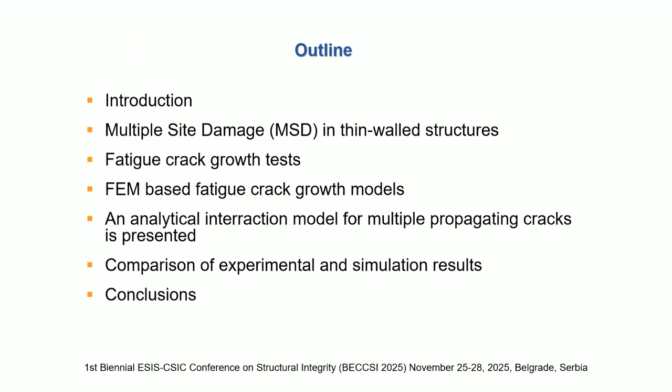So here is the outline. I will give a short introduction, then we will speak about multiple site damage in thin wall structures and fatigue crack growth, present results of fatigue crack growth tests, then finite element based fatigue crack growth models, and present in more detail an analytic model for modeling interaction of multiple propagating cracks. We will compare experimental and simulation results and draw some conclusions.

So cracks may initiate at sharp notches or sites of stress concentration due to geometrical discontinuity. Several cracks initiate in a line, so-called multiple site damage is generated. It can eventually lead to crack coalescence, creating large-scale damage. Thin wall structures such as aircraft and ship structures are prone to fatigue cracking and multi-site damage or multiple cracks.

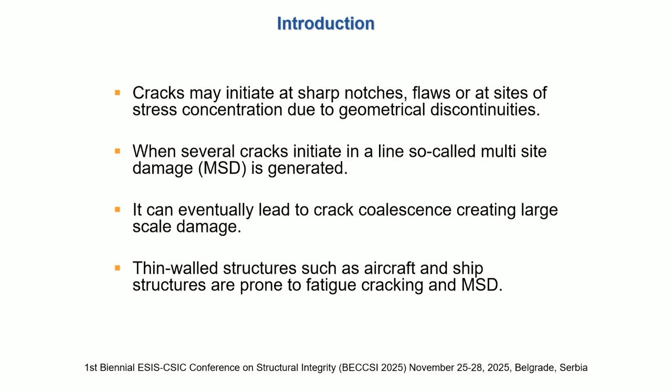This nicely shows stages in the fatigue life. So we declare initiation period and crack growth period. Here we speak about the crack growth period, about growth of large cracks.

As you know, we can do experiments and obtain the crack length with respect to number of cycles. And then from this we can design a crack growth rate diagram. From this diagram, we can assess, for example, Paris equation constants or any other power law constants.

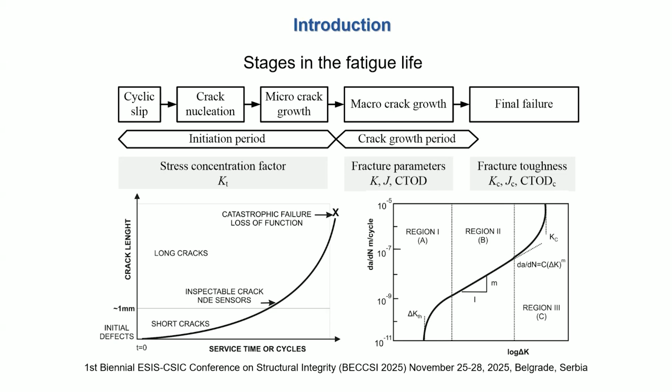So what is multi-site damage? Fatigue cracking examples: here we see a Aloha Airlines Boeing 737. This accident occurred in '88 or '89, I don't remember. So what we have here is at the upper rivet row, initiated cracks at the rivet locations. Then on the surface, under cyclic loading caused by landing and taking off, cracks are initiated, they propagate, they collide, and in this case large-scale damage is generated.

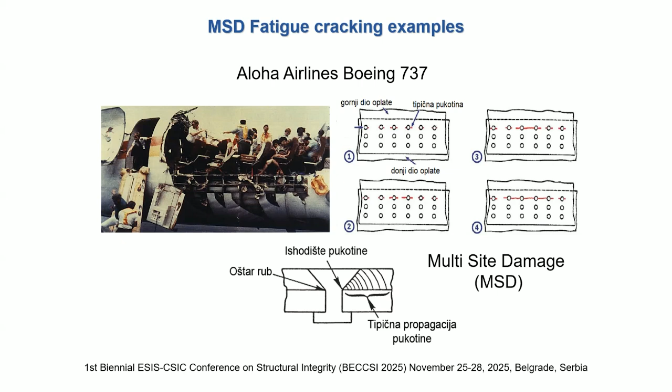Similar situation we have with ship structure. What you can see here is the deck structure turned upside down, and you have different panels in longitudinal directions, and you also have bulkheads every 5 meters. So these details are produced by welding, so there are stress concentrations due to geometrical discontinuities and residual stresses. And cracks initiate here, similar to the Aloha example, in several occasions.

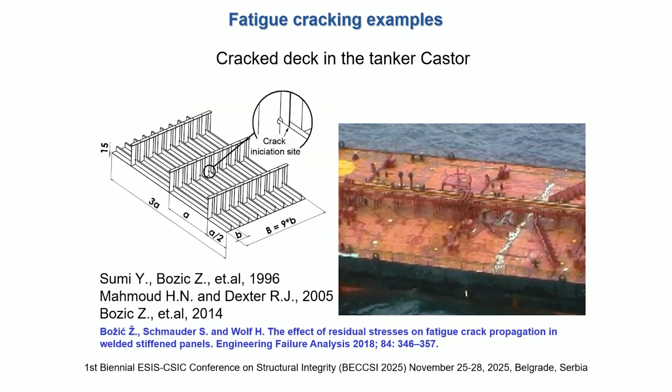Basically, fatigue is a multi-scale fatigue phenomenon. So we can assess some parameters like critical resolved shear stress on the atomistic level and use them on the micro scale level as input data to, for example, the Tanaka-Mura model and assess fatigue life to crack nucleation. After these cracks become a little bigger, like 1 millimeter or longer, then we have a different way of propagation - long fatigue cracks, for which we use power law models such as the Paris equation.

So I'm showing one paper which was published in 2014 in Fatigue and Fracture of Engineering Materials and Structures. I think Professor Hong is not here, he is the editor-in-chief of the journal.

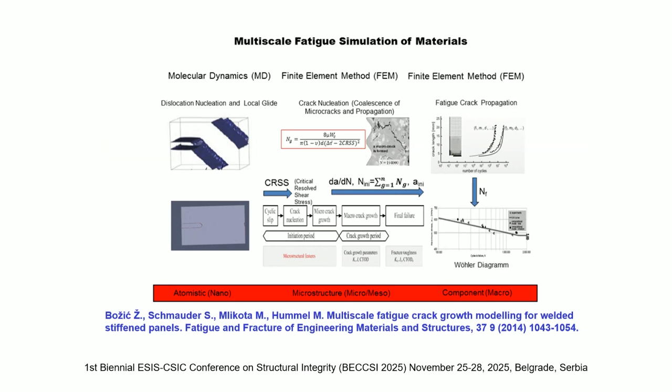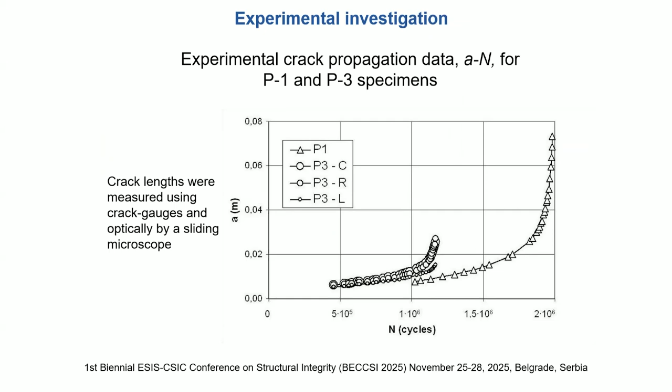You see that it's a very big difference when you have multiple site damage. When there are more cracks, fatigue life is much shorter. This is what we obtained and analyzed experimentally, and we want to simulate this.

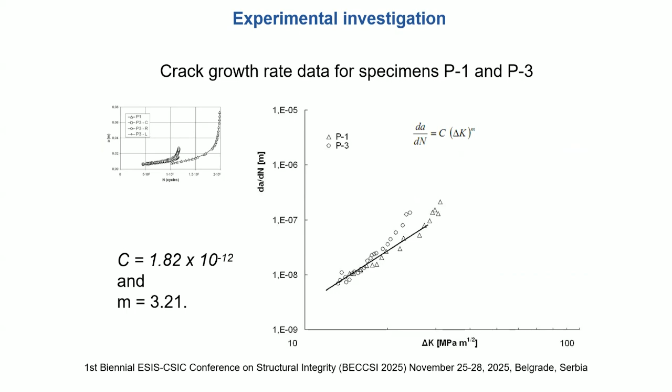For this, we will use the Paris equation as shown there. As mentioned before, we generate a crack growth rate diagram, and from this we obtain constants like C and M as shown here.

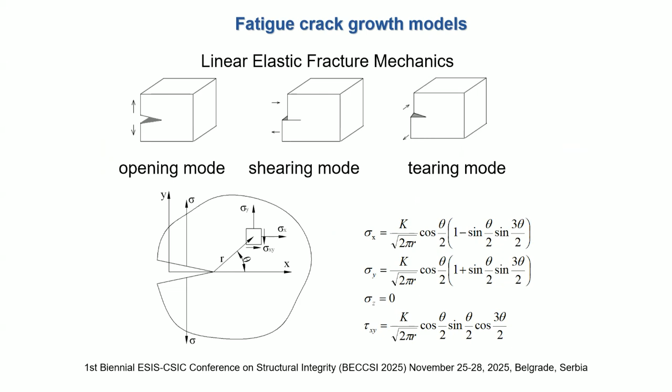Basically we have here mode 1 opening, only mode 1. This is how we look at this problem: the cyclic loading, we have crack extension for each cycle, some delta A, and then use the Paris equation to simulate this.

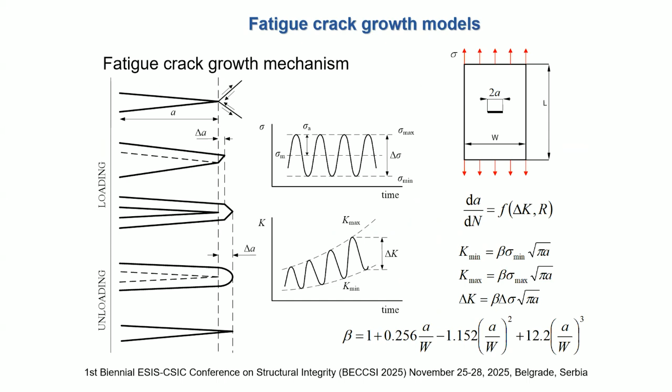This is our specimen P1 with 1 central crack. To simulate this, we can use the Paris equation, but we need stress intensity factors. They can be calculated analytically, but it's better to calculate them numerically.

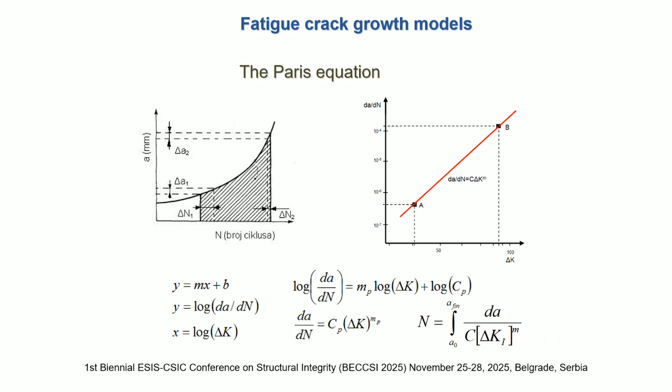From the crack growth rate diagram on the right side, we can obtain this equation here, called the Paris equation. If we write this equation in another way, we can calculate the number of cycles needed to propagate from some initial crack length to some final crack length. This is very fine, we all know this.

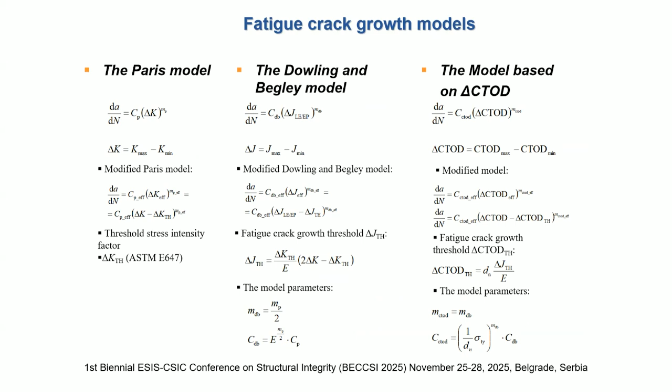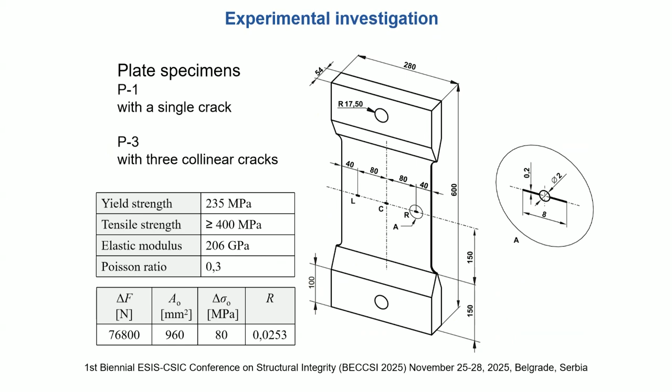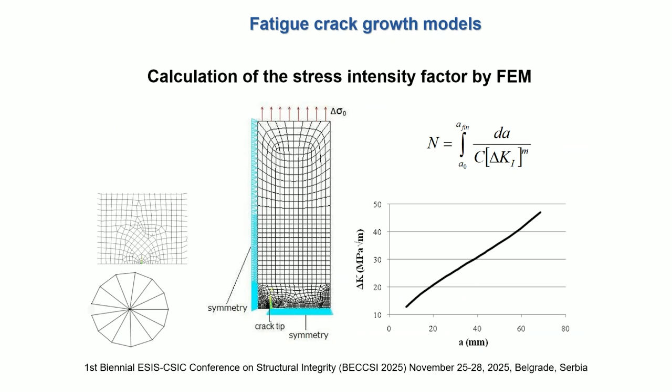So we have K now, and we have K not as a function, but as discrete points. So we will integrate this equation numerically. Basically what we have here is...

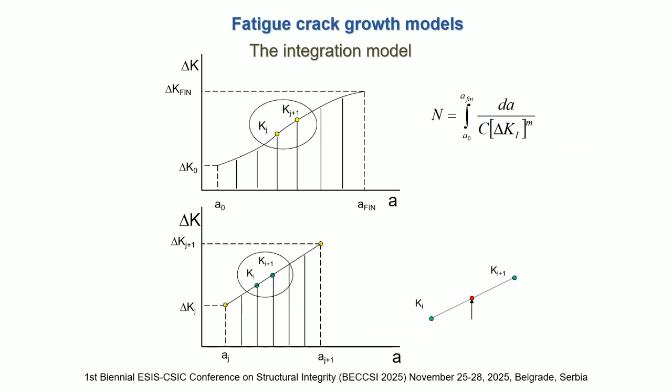...a straight line between two points for which we calculate K. So it's a piecewise linear curve for which we calculate the stress intensity factor by this method, and we will integrate this equation directly.

Stress intensity factors calculated for the P1 specimen are shown here, and that's very easy to do for one specimen with a single crack. Then we have experimental results like 2 million cycles and simulation results, and the simulation fits very well to some 30 millimeters crack length when we are in the pure Paris region.

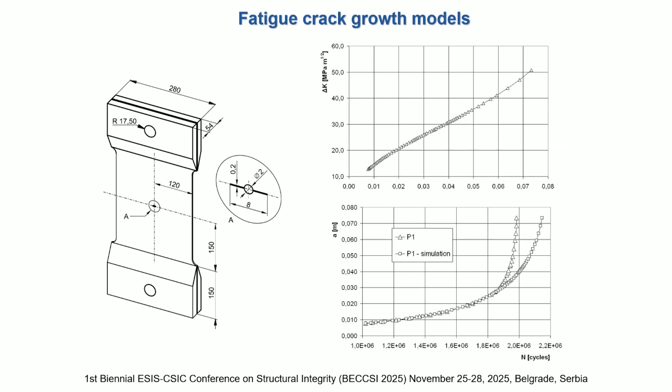Then we have some statistics done on the experiment of crack propagation, and the simulation still uses this model which applies Paris equation. So this is what I just mentioned.

For the specimen with 3 cracks, this is the experimental result, and we want to simulate now. We want to simulate fatigue life, but with 3 cracks, it comes to what I mentioned at the beginning, what Dr. Son also mentioned: interaction between the cracks. How can we model this interaction?

You can use the extended finite element method for this. But sometimes you don't have everything under control, whereas with an analytical model it's perfectly under our control, and we will learn how it works.

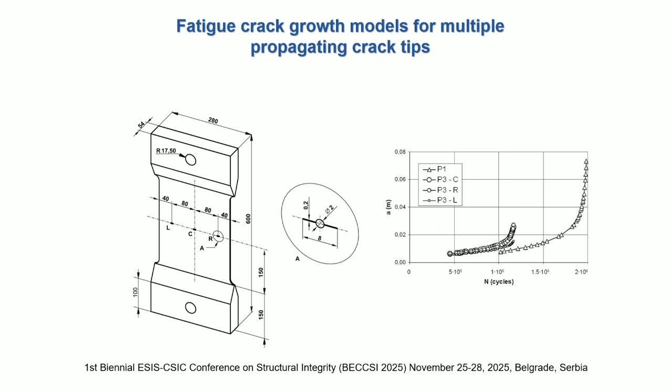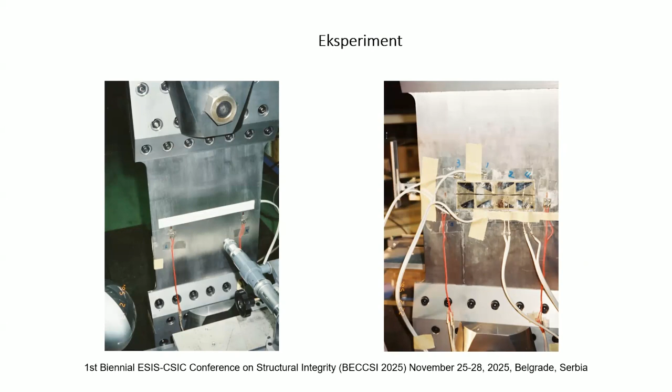So this is basically the one crack, before the experiment and after the experiment. And this is 1/4 of our specimen. We have 3 cracks, but due to symmetry we consider only 1/4, so we can basically have 6 crack tips, but due to symmetry we consider only 3 crack tips: 1, 2, and 3.

So we show them here. What do we do? Well, first we should assume an initial crack length, and we have taken this from our experiment - the cracks were of certain lengths. So we started from the experiment, then we simulated and compared with the experimental result later.

So we have to take one crack tip as a reference. In this case it's tip 1. And for the other 2 tips, we should see how they interact.

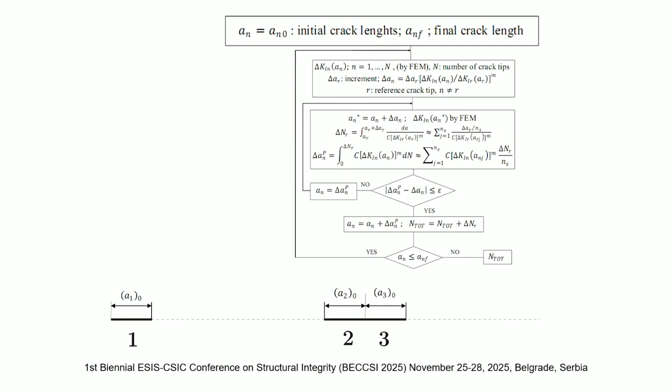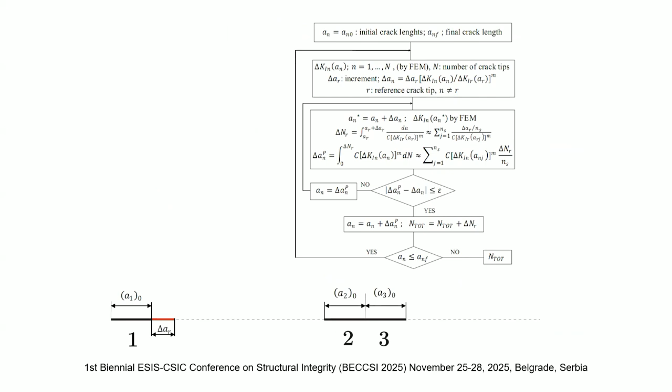So this is what we have as a first one from our experiment. We give some initial increment for the reference crack tip, and then we assess increments for the other 2 crack tips by using Paris law in this way, which is a good way to do it. Then we have this assessed increment for crack tip 2 and crack tip 3, and then we have to check, is it good or not?

How do we check this? We will calculate delta a P by the opposite way. Now we don't calculate number of cycles, but we calculate propagated crack length. So we do this for tip 2 and for tip 3, and then this is better. We should repeat these steps until we receive convergence, when the difference between assumed and calculated crack length is less than some limit, some tolerance.

We repeat this, and when we reach some final crack length, this final crack length can be determined - fracture will occur if a crack reaches our critical crack length. So, some crack length before fracture occurs.

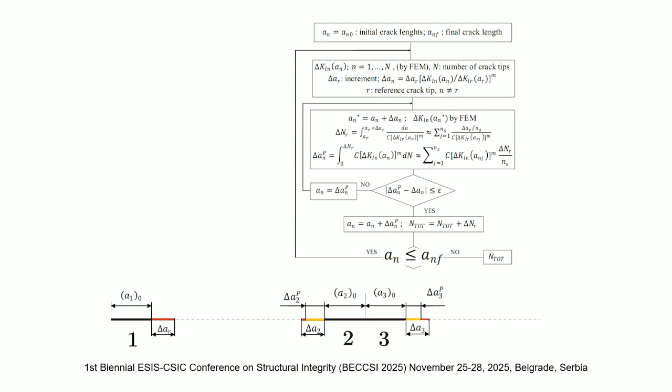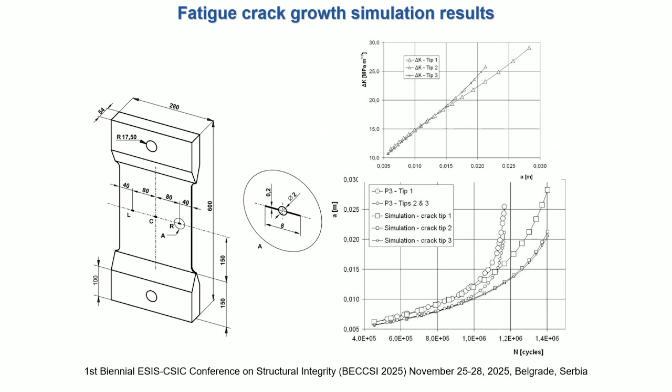And how do we know that what we have simulated is good or not good? We have taken crack tip 1 as a reference. So we will repeat the simulation, taking crack tip 2 as a reference instead, and then we'll compare these 2 simulation results.

This is what I wanted to show you - this analytical method for taking into account interaction of multiple propagating crack tips. We can do more examples, where some cracks can be longer and others shorter, again to see this interaction. Basically, there is no interaction if these cracks are far apart and if they're short. But if they are big, then there is very strong interaction.